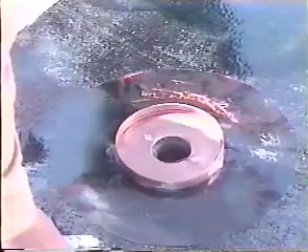Rain must also be considered as a separate load source. Some municipal bylaws restrict the volume of rain runoff from building roofs. Thus, design for water retained on the roof may be a consideration. Ponding of rainwater on a roof because of roof frame deflection can also produce heavy loads. Drains at low points and roof stiffness to avoid excessive deflection will therefore also be design considerations.

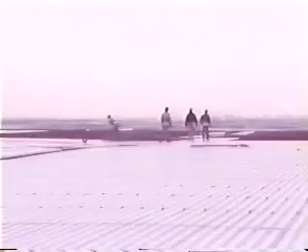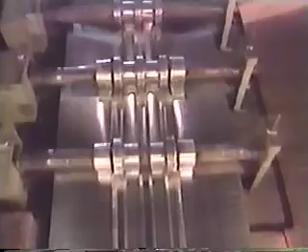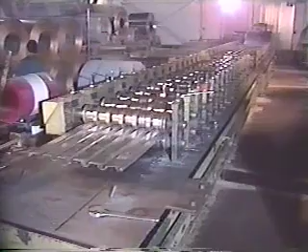To carry roof loads due to snow and rain, sheet steel is the first line of defense. It's used in this way. A coil of sheet steel is roll-formed into a roof deck profile, one chosen by the designer from a number of standard profiles. A flying shear is used to cut it into lengths suitable for the project. The choice of profile is usually based on deck span, thickness of sheet steel, and loading on the roof.

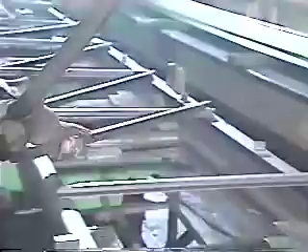The roof deck is supported on open web steel joists, or OWSJs as they're known. Each joist manufacturer uses his own proprietary designs, selecting components to comply with performance criteria specified by the building designer. Production on an assembly line basis explains the economy of joists when many identical members are required.

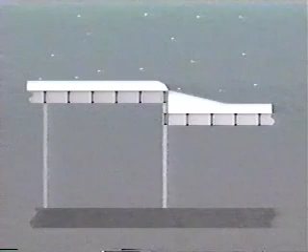But what about non-typical areas? We talked earlier of local roof loads created by snow pileup. One solution to this problem is to design a joist with a larger capacity to support the additional loads and space the joists at the normal spacing. However, it should be remembered that when a small number of joists are used, the efficiency of production is substantially decreased, driving costs up. Therefore, it may be more cost-effective to reduce the spacing and use joists of the same size used in other areas of the building to produce the necessary load capacity.

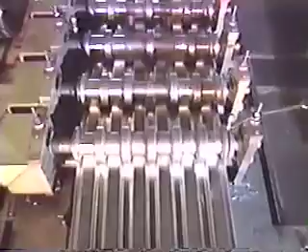Reducing joist spacing also reduces the roof deck span. This will increase the load capacity of the roof deck and thus avoid the need for a change in deck strength in areas of heavier loading. At this point in our story, we've looked at roof deck and joists, how they are manufactured and how they are used to support roof loads.

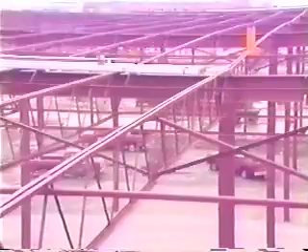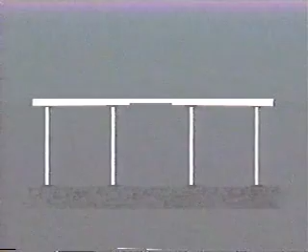Now, let's turn our attention to girders, the primary members which support the joists. Many girders are designed as cantilever girders, also known as Gerber girders, after Heinrich Gerber. Gerber used the concept in European bridges more than a century ago to achieve some of the benefits of continuous girders, with the structure remaining statically determinate.

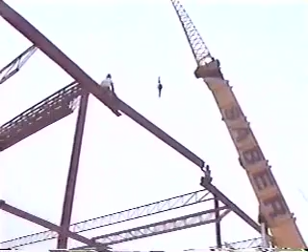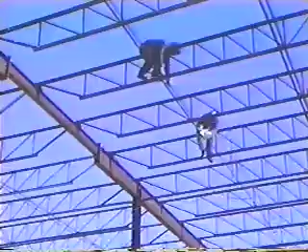In buildings, girders are continuous over adjacent columns, with simple span drop-in segments attached to the ends of the cantilevers. Continuity over the supports reduces deflections and simplifies connections. This system is also economical in terms of material savings and simplicity of shop fabrication and field erection.

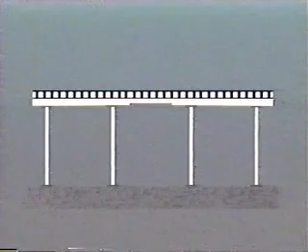When considering this type of design, one subtle but very critical fact must be recognized. The maximum bending moment under uniformly distributed loads frequently occurs over interior columns. This point of maximum negative moment coincides with the maximum shear force in the girder. Thus, stability of this girder column joint is an essential consideration in the design of the girders and the columns.

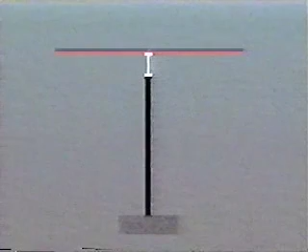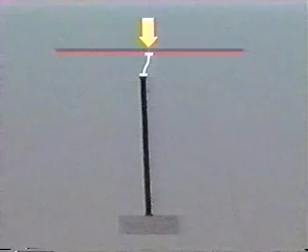When roof loads are low, as they are most of the year, the assembly, as illustrated, may remain stable. However, as loads increase, there is a tendency for the bottom flange of the girder and the top of the column to move laterally, creating a potentially unstable condition. Let's look at the framing details for a solution to this problem.

Loads are transferred to the girder top flange from joists. Good practice dictates that there will be a joist at or near the column. An extension of the joist bottom chord may be used to tie and stabilize the girder bottom flange, thus stabilizing the top of the column.

An alternative to bottom chord extensions is to place stiffeners on the girder web above the column. They may be sized to provide column continuity, joint stiffness, and thus joint stability. Designers frequently combine these two systems for simplicity in design, construction, and additional safety.

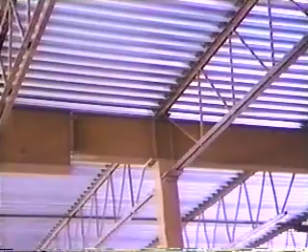We've looked at the primary and secondary roof framing members, which carry loads to the columns. Now let's look at the columns themselves. First, we'll deal with interior columns. These columns are normally designed as axially loaded, pin-ended members, which are laterally unsupported along their length. Their design length is approximately the same on both principal axes.

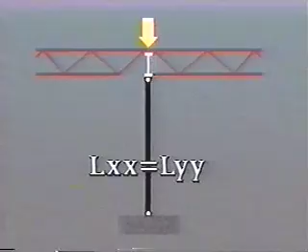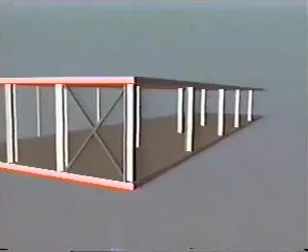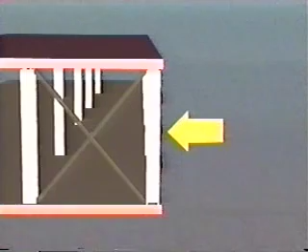Because of this symmetry, and because they are loaded as pure compression members, square hollow structural sections are usually the most economical choice. Now let's consider exterior columns. A new set of design criteria is often involved. First, there are wind loads on the exterior of the building to consider. Wind produces loads on both windward and leeward faces of the building, as well as uplift forces on the roof.

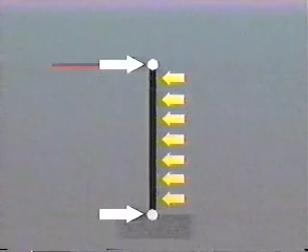The building walls may be capable of spanning from foundations to the top of the building, thus distributing wind loads in more or less equal shares to the roof level and to the foundations. In such cases, the exterior columns can function primarily as axially loaded members.

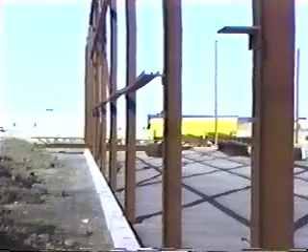Much more frequently, however, the wall consists of cladding attached to the exterior columns. Wind loads on the cladding are locally transferred to secondary framing members known as girts, and in turn from the girts to the exterior columns. Let's take a closer look at the girts. Girts are used in a horizontal plane, with their spacing often determined by the load capacity of the cladding panels used. The columns then must support both wind loads on the wall and axial loads from the roof.

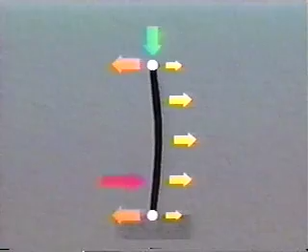In many cases, girt loads will be applied to the columns through attachment to their outer flanges. These horizontal loads may reverse depending on wind direction, making it necessary to consider stability of the inner column flange. With a requirement for both axial load capacity and bending capacity, a column with greater strength on its primary axis, such as a wide flange column section, will usually be chosen.

The spacing between primary exterior columns is usually a reflection of the interior column grid and may be too great for economical spans of the wind girts. Therefore, secondary columns may be introduced between the primary columns to reduce the span of the girts. These additional columns are known as wind columns. In fact, they might well be referred to as wind beams because their major function is to resist horizontal loads from the wind girts.

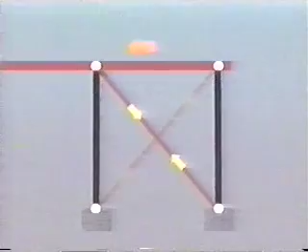Up to this point, we've looked at the main framing elements used in constructing a single-story building: the roof deck, the joists, girders, interior and exterior columns, girts, and wind columns. Now let's see how these framing elements work together in tandem with the bracing to resist horizontal loads due to wind or earthquake, and of course to provide overall building stability under gravity loads.

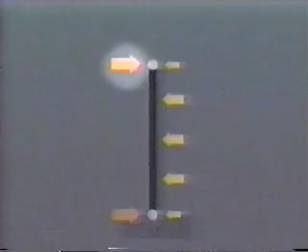Loads at the bottom of exterior columns are transferred directly to the foundations. Loads at the top of the exterior columns must be resisted at the roof level. The designer must find a way to distribute these horizontal loads at roof level to bracing elements, which quite frequently can only be accommodated along the perimeter of the structure. The question then arises, how are loads transferred to these isolated elements?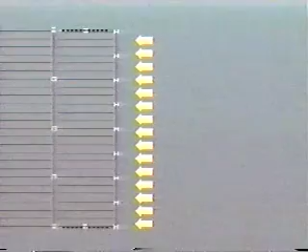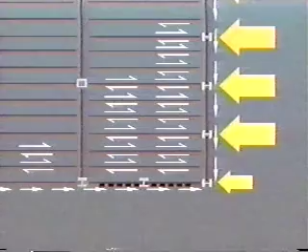Use of the roof as a structural diaphragm is the most common means. A steel roof deck, along with joists which act as stiffening elements, form this structural diaphragm. The diaphragm must have the capacity, both overall and internally between adjacent elements, to transfer forces across the width of the diaphragm. In addition, the boundary of each diaphragm must have sufficient connections to transfer forces through the bracing elements

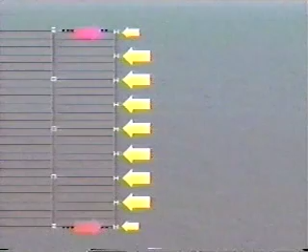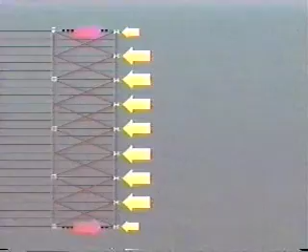to the foundations. In some cases, a steel deck diaphragm may not be capable of distributing forces applied on the building. A bracing system in the plane of the roof is then used to supplement the diaphragm locally, where stresses are high, or to replace the deck diaphragm.

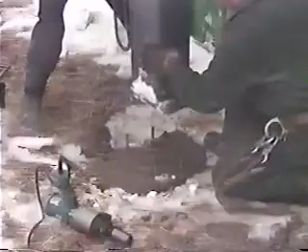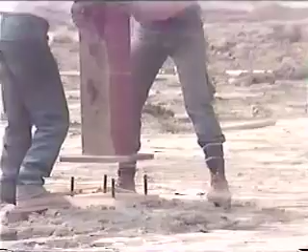Now that we've examined loads and the components which support these loads, let's look more closely at actual site construction. The building contractor will construct footings to plans and specifications, complete with anchor bolts. The shop-fabricated columns with base plates attached are erected and shimmed to correct elevation, ready for grouting. As an alternative, leveling plates are installed and grouted prior to column erection.

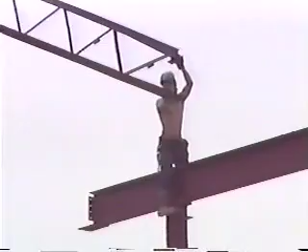After several columns have been bolted down, the cantilever segments of the girder system may be erected. The drop-in spans are then added to complete the lines of primary framing elements. Usually a tie joist, that is, a special joist with a bottom chord extension, will be placed on the column grid lines. This bottom chord extension is used by the erector in plumbing the frame.

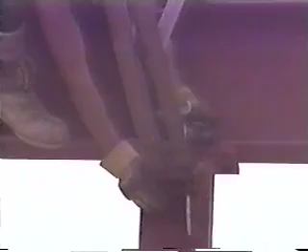Earlier, we talked about the large negative bending moment at this point in the girder. This critical location in the frame is stabilized by connecting the joist bottom chord, thus ensuring stability of the girder bottom flange and the top of the column.

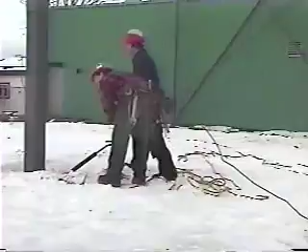After the girders are placed and stabilized by the tie joists and plumbing cables, bundles of open web steel joists may be placed on the frame. Here they are spread to the specified spacing, where they are attached to the girders, usually by welding. Bridging is then installed to brace the joists.

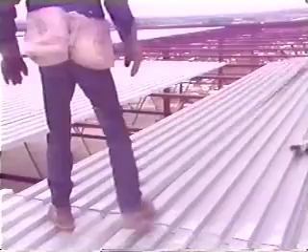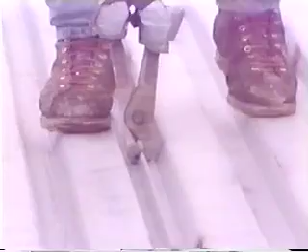The joists and the girders are two elements in the roof system. The third structural element is the steel roof deck. The deck is installed by placing panels side by side on the joist top chords. Each panel is welded or mechanically fastened to the joists. Side seams are connected for vertical load carrying capacity, with additional connections for roof diaphragm capacity if required.

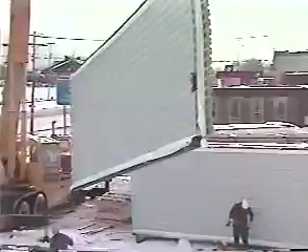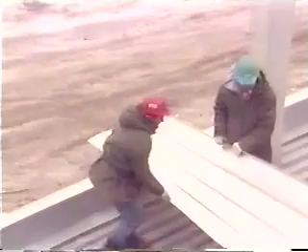Now for a closer look at the building wall. Various forms of wall systems may be used. Wall panels may be factory manufactured and shipped to the site in large elements. Alternatively, the wall system may be field manufactured, beginning with a liner sheet attached to the structural girt system, followed by the installation of subgirts, insulation, and the exterior finish panels.

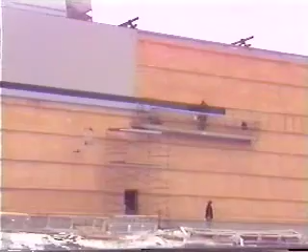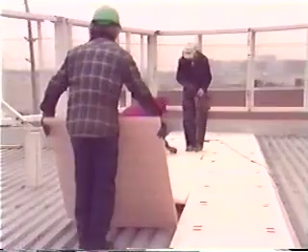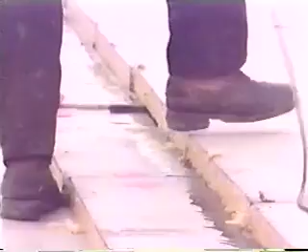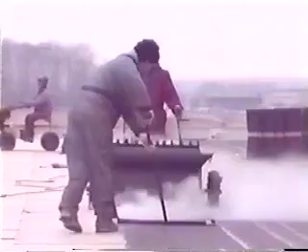While the installation of the wall cladding is taking place, one other construction process is underway: the completion of the roof system. In a commonly used roof system, insulation is placed on the roof deck and connected to the deck to prevent wind blow-off. The thickness of roof insulation may vary depending on the temperature requirements of the occupants and the energy conservation philosophy of the owner. Insulation is followed by a waterproof coating, usually asphalt paper applied in several layers, with hot asphalt as a bonding agent and protected by a layer of fine gravel.

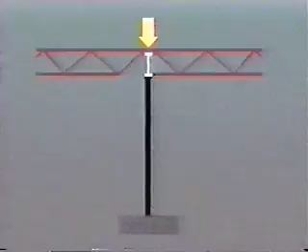In this program, we've examined the structural elements used in constructing a single-story building. We've seen how each of these framing elements plays a key role in transferring both vertical and lateral loads to the foundations. And we followed their assembly into a cohesive design, which ensures stability of each framing component, as well as overall stability of the building. Finally, we've seen the frame enclosed with its architectural finishes to complete the creation of a new workspace.

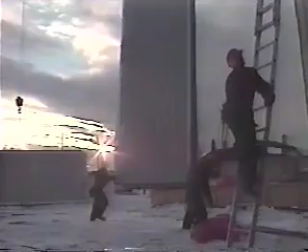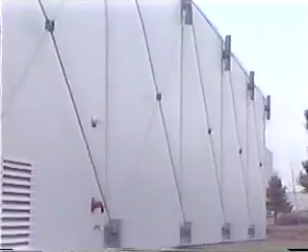Each structural element complements another, often acting in a dual capacity. Architectural finishes may also contribute in a structural function. This is the engineering challenge of the single-story building, a challenge to produce a highly optimized, yet repetitive and economical design. A challenge to produce yet another functional, attractive building in our urban